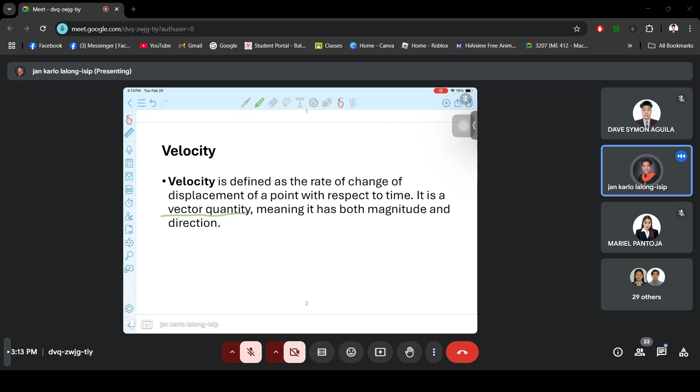Okay, so velocity analysis, understanding velocity in machine elements is crucial for the design analysis and optimization of mechanism. So velocity analysis helps engineers to predict the motion of different parts of a machine, ensuring it functions smoothly and efficiently. So this knowledge is essential for determining the speed and direction of the motion of the machine components.

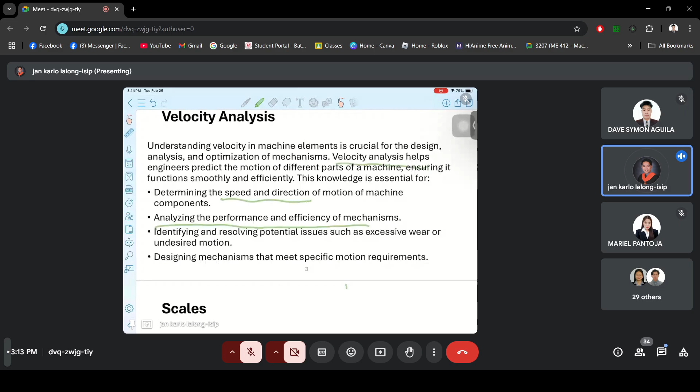It is also used to analyze the performance and efficiency of mechanism, identifying and resolving potential issues such as excessive wear or undesirable motion. Also, designing mechanisms that meet the specific motion requirement. So those are some of the pinagagamitan ng ating velocity analysis. Bakit siya importante na isolve?

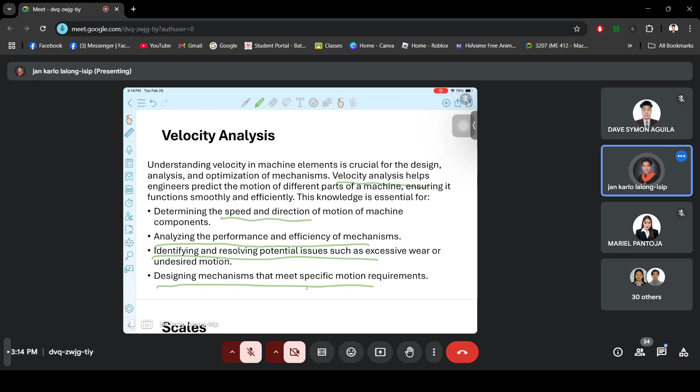Okay, so in velocity analysis, we are using different scales. So since, okay, so kasi when we are solving velocity or we are conducting a velocity analysis, we are both using our analytical and graphical method. Kaya naman, in velocity analysis, napaka-importante na meron tayong scales.

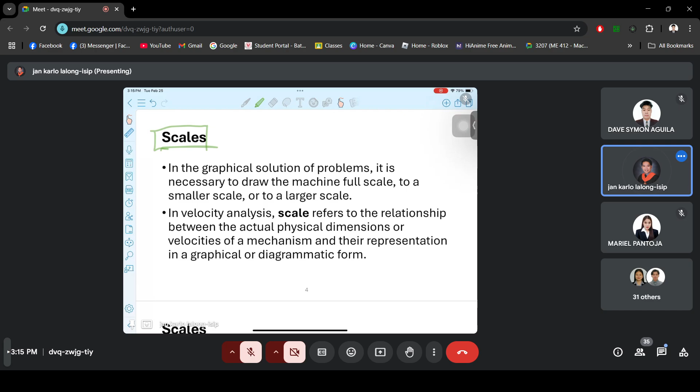So, in graphical solution of problems, it is necessary to draw the machine full scale to a smaller scale or to a larger scale. So in velocity analysis, scale refers to the relationship between the actual physical dimension or velocities of a mechanism to the representation in a graphical or diagrammatic form. Okay, so we have a different symbol for scales.

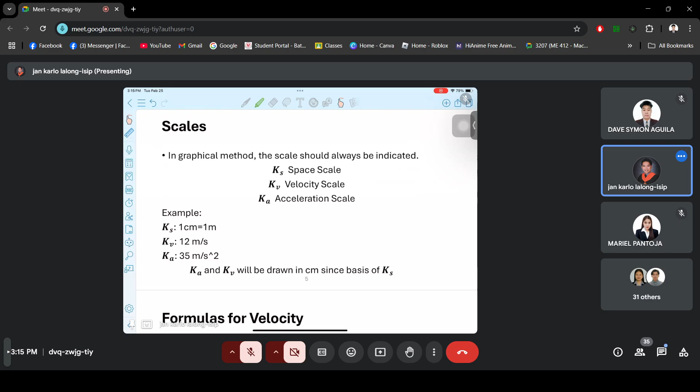So kapag ka ang nakita natin sa problem is K sub S, meaning that is a space scale. So position lang yung ating mini-measure dyan. Yung length lang ng ating mga links, length ng ating components ng ating mechanism. Kapag ka naman K sub V, that is velocity scale, ibig sabihin the scale represents our velocity. And pag K sub A, that is acceleration scale.

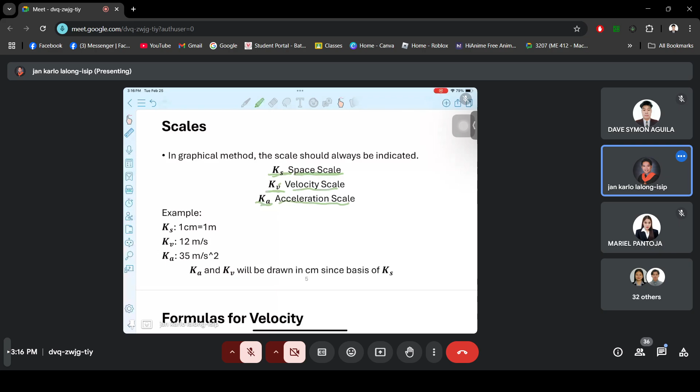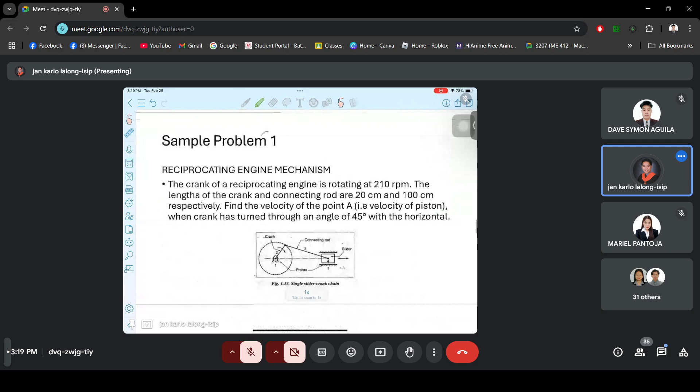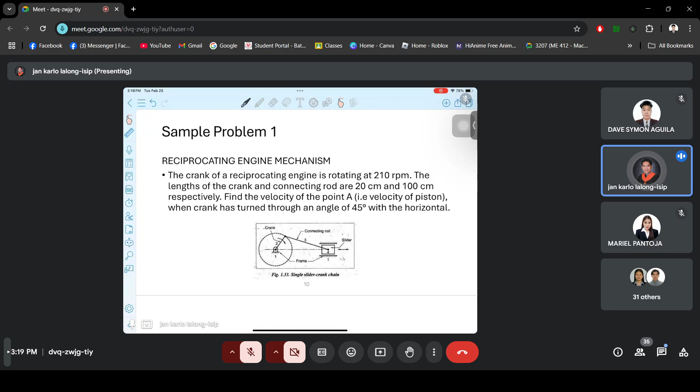Okay, so mas madali nating maintindihan yung ating paggagawa ng velocity analysis kapag meron na tayong problem. So that's why we have here a sample problem. And let's try to solve this one. Okay, so sabi dito, this is a reciprocating engine mechanism. So the crank of the reciprocating engine is rotating at 210 RPM. So we have N is equals to 210 RPM.

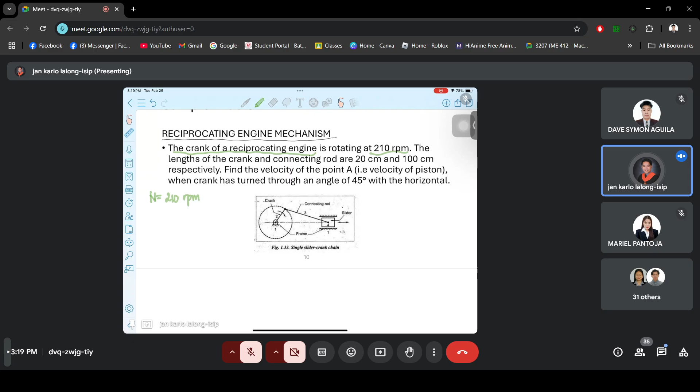The length of the crank and the connecting rod is 20 centimeter and 100 centimeter respectively. So we are going to find the velocity at point A when the crank has turned through the angle of 45 degrees with the horizontal. So for this pala, this is a slider crank mechanism. Pero mali lang yung nilagay kong figure. So let me correct yung ating drawing dito.

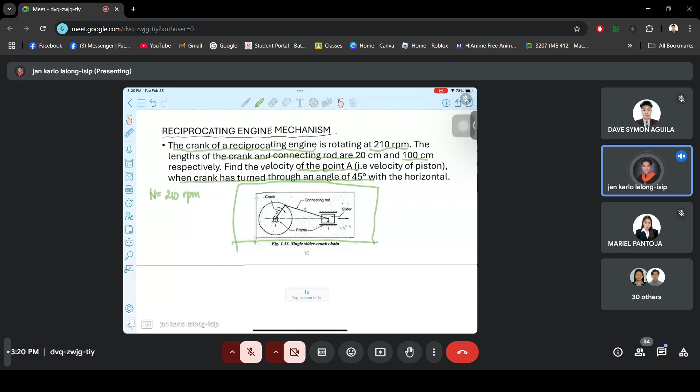Okay, so kindly take note lang of the problem solving steps para hindi tayo mahirapan kapag binigyan na tayo ng problems, para alam nyo kung paano siya isosolve. Okay, so first step, we are going to have the illustration for us to visualize ano ba yung ating kailangang kunin na mga values. Okay, so if we have a slider crank mechanism, we have these links. So we have the crank, so ito yung ating pinaka-crank, di ba? We have our connecting rod.

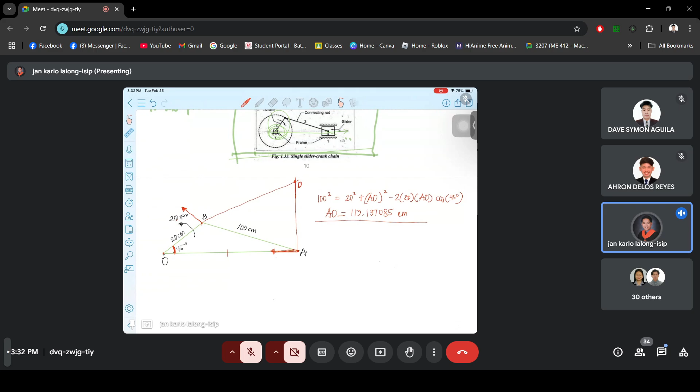Tapos we have, so we are going to extend yung ating line OB. So ito yung ating intersection. So let's name this point D. With that, mas madali na nating mahahanap yung ating mga missing values. So this is only initial graph ng ating slider crank. So we need to have the exact value ng ating graph para makuha natin ang length ng ating line BD at saka line AD.

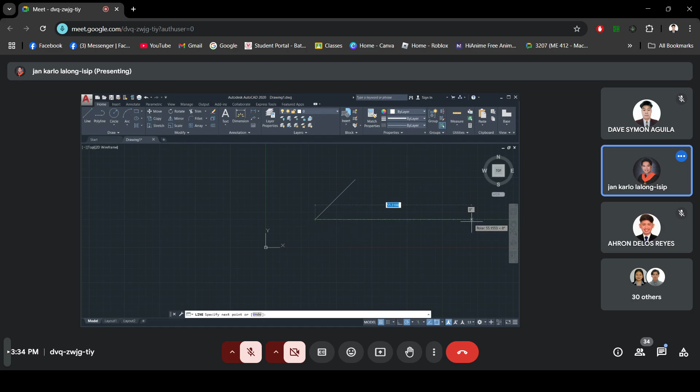Okay, so itry natin ngayon sa ating AutoCAD. So kapag kayo na yung gagawa, we have our ruler and protractor para mas madali natin magawa. So para lang din mapakita ko sa inyo kung paano siya gawin, we are going to use AutoCAD. Okay, so yung ating given kanina, we have the crank na meron daw 45 degrees, tapos siya ay 20 centimeter. So when you are using your paper, you must use scale para mas madali siyang ma-drawing. Tapos, we have find yung ating line connecting ng ating crank at saka ng slider. So, na-solve natin yung line AO to be 113.137085.

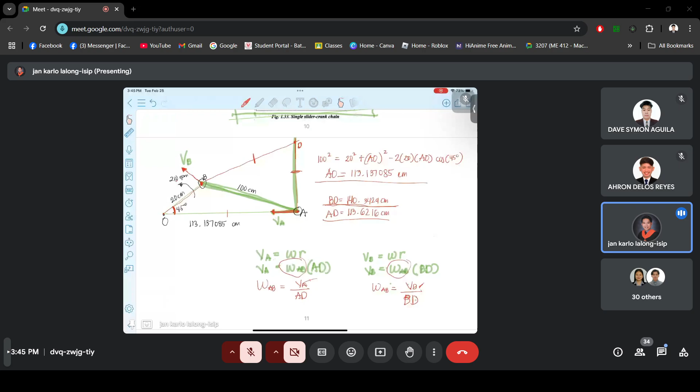Okay, so wait lang, nagkakaproblema lang, mabagal ata ang internet.

Okay? So, since meron tayong given na speed sa ating crank, pwede nating mahanap yung ating velocity at point B. So, paano? So kanina, we have the formula for velocity, which is the angular velocity times our radius. So if we are going to get yung ating velocity at B, pwede natin gamitin yung ating angular velocity at the crank. So that is angular velocity at OB times our radius. Ang ating radius ay OB.

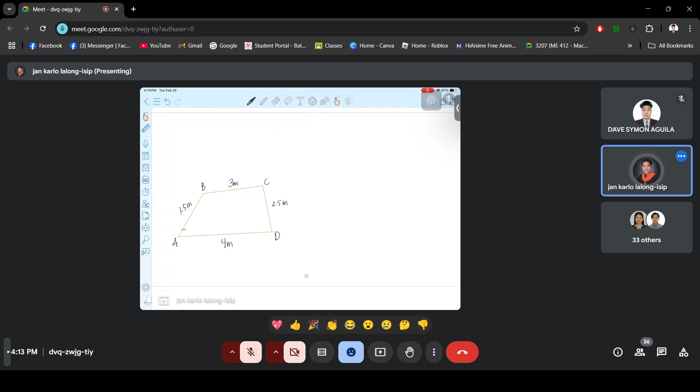Tapos, the driving link AB. So, that is the crank. AB is 1.5 meter. Tapos, the driven link CD ay 2.5 meters. Tapos, yung ating connecting link BC is 3 meters. Tapos, we are given angle BAD, which is 60 degrees.

Okay. So now, para mas madali nating mai-graph yung ating given four-bar linkage, we are going to get yung ating transmission angle at saka yung ating output angle. So, ilang beses na tayo nakapag-solve ng ganito. So, kindly solve what will be our value of the transmission angle and the output angle.

So, I will give you 5 minutes to answer. Tapos, maglagay na lang ako ng pagpapasahan nyo sa Google Classroom para alam ko that everybody is trying. Okay, so please solve for the transmission angle and the output angle. So I will give you, sige, mga 10 minutes na pala to solve.

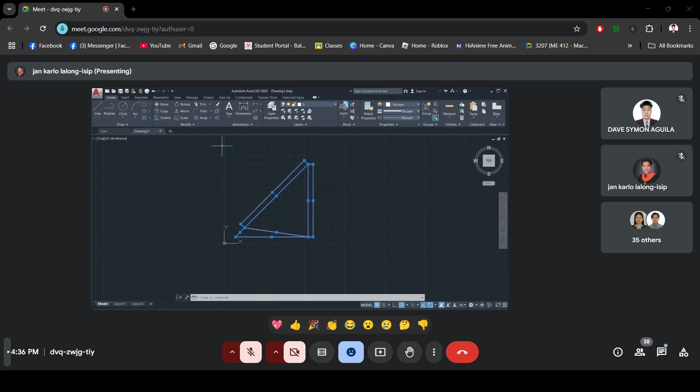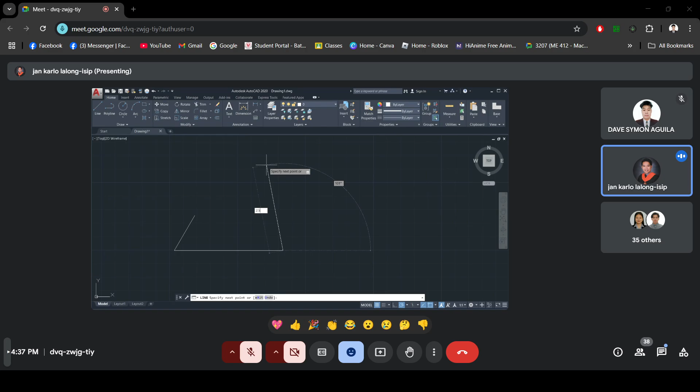So ngayon, we are going to have the graphical method naman para makuha natin yung exact illustration ng ating 4-bar linkage. Okay, so let me share again yung ating AutoCAD. Okay, so dinodrawing ko lang dito yung ating nakuha na values kanina. So again, we have the crank na 60 degrees na angle. Tapos yung ating output angle naman, that is 101. Tapos ang kanyang length ay 2.5. Tapos ito, we have 3 meters.

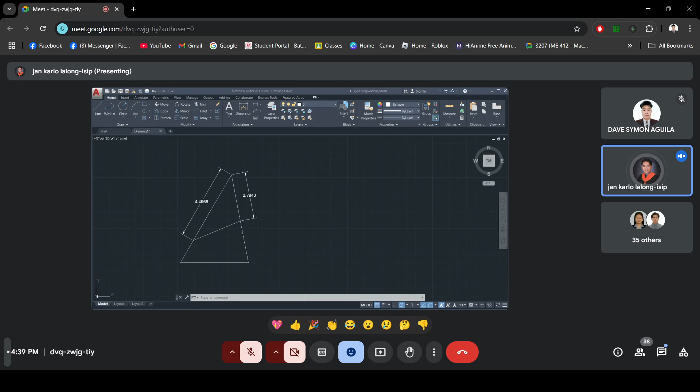So ang next step natin, kukunin natin ulit yung ating instantaneous center. So with that, i-extend natin yung ating dalawang link dito. So ito, extend lang natin. Tapos ito, extend din natin yung ating link number 4. Okay, then we are going to get yung kanyang dimension. So I will just take note muna yung ating measurement na nakuha. So we have CO is equals to... Okay. So let's go back dun sa ating presentation.

Okay. So ang ginawa natin kanina, we have the extension. So burahin muna natin to. Okay. So, in-extend natin itong ating link AB at yung ating link CD. And we have this point. Tapos, using our graphical method kanina, we have discovered na ang length, so let's just say this is O. So, our CO, yung length na ating CO ngayon, that is 2.7843 meters. Tapos yung ating BO ay 4.4968 meters.

Okay. So ngayon, we are going to proceed na with our velocity analysis. So, focus muna tayo dito sa ating figure na ito. Okay, so according sa ating problem, may isa pa diyang nakalagay na our link AB rotates at 25 RPM. So this link AB has the speed of 25 RPM. Okay. So with that, we can get yung ating velocity at point B. So this is our velocity at point B. So ang hinahanap natin dito is our angular velocity at CD. So CD, itong side na ito. Itong link na ito. At saka sa BC, so itong link na ito.

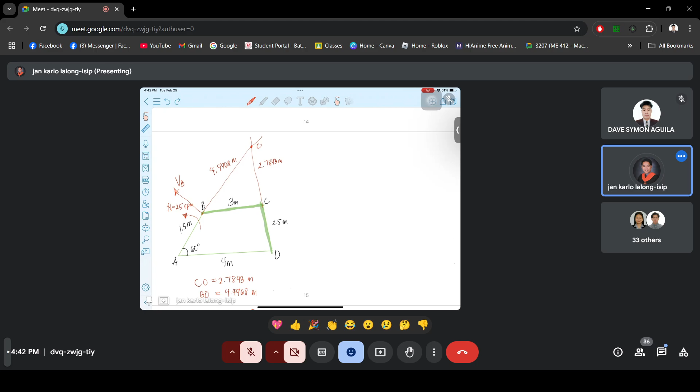Okay, so paano ba natin yan hahanapin? So, buburahin ko na tong part na to. So, have you taken the screenshot naman? Okay, so makukuha natin ngayon yung value ng ating VB since makukuha natin yung angular velocity at AB. So we have velocity at B. So using yung ating formula, we have the angular velocity at AB times our radius. So ang ating radius dito is our crank or AB. So let's just simplify yung ating formula na angular velocity at AB times our length of AB.

Okay, so first we are going to solve yung ating angular velocity AB. So we have angular velocity AB is equals to 2 pi n, which is equals to 2 pi times our n, 25 revolutions per minute. Tapos, gawin na lang natin siyang in seconds, kaya 1 minute is equals to 60 seconds. Cancel yung ating minutes. So, what will be the value of our angular velocity AB? Paki-compute. So we have 2.617993878 rad per second.

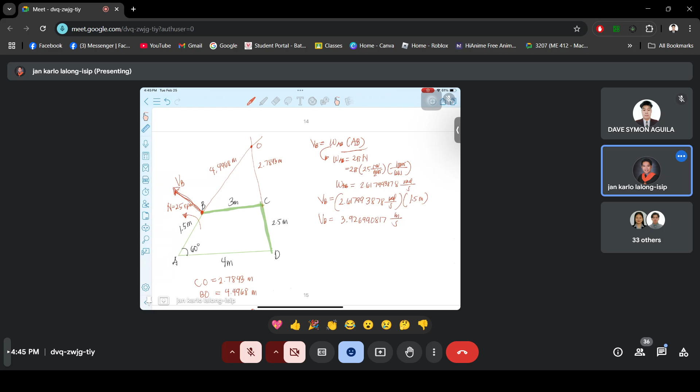So, kung makikita naman natin, this is still perpendicular dito sa ating line OB. Diba? So, meaning, pwede natin makuha yung ating angular velocity at BC, dito sa side na ito. Okay. So, velocity at B is equal also sa ating angular velocity at BC since this point is at this link. So, the angular velocity of BC times yung line na perpendicular sa direction ng ating velocity, which is the length of BO.

Okay. So, we have VB na value, kaya makukuha na natin yung ating angular velocity at BC, which is equals to VB over BO. So, ang VB natin is 3.926990817 meters per second over yung ating BO na value ay 4.4968 meters. So, what will be the value of our angular velocity BC? We have 0.8732856291 rad per second.

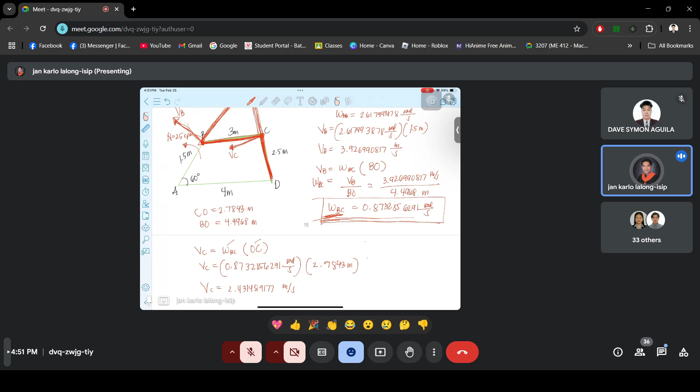So ito ba yun? We have 2.43148. Okay, so pare-pareho naman yung sinesend yung sagot. So 2.431489177 meter per second. Okay, so since meron na tayo nito, velocity at C, pwede na natin kunin ngayon itong ating angular velocity CD, which is our missing value.

Okay, so velocity at C, using the formula, since this line is also perpendicular dito sa ating CD, so we have the angular velocity at CD times our length ng CD. So using this equation, we can have the angular velocity CD is equals to VC over CD. Ang value natin ng VC is 2.431489177 meter per second. Tapos, ang length ng ating CD ay 2.5 meters.

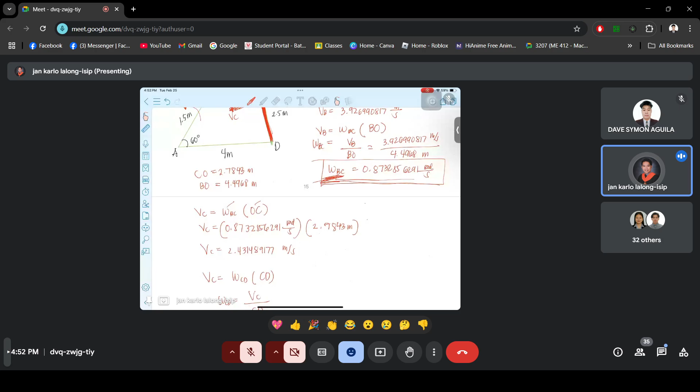Okay, so what will be the value of our angular velocity at CD? So we have 0.9725956709 rad per second. Okay, so with that, nakuha na natin yung missing value natin, which is the angular velocity at BC and the angular velocity at CD. Okay, so nakuha ba yung ating velocity analysis using the instantaneous center of rotation method?

Okay, so I think medyo mahirap nga siyang i-absorb, but if you get kung paano yung sunod-sunod at yung concept kung paano siya kukunin, you just need to review it para ma-master nyo kung paano siya gawin. So hindi nyo naman din talaga matatandaan yan just after this class. So you need to practice. So I hope you take a screenshot ng mga na-solve natin para after this class you can practice that, and also for the preparation for your examinations and design plate.

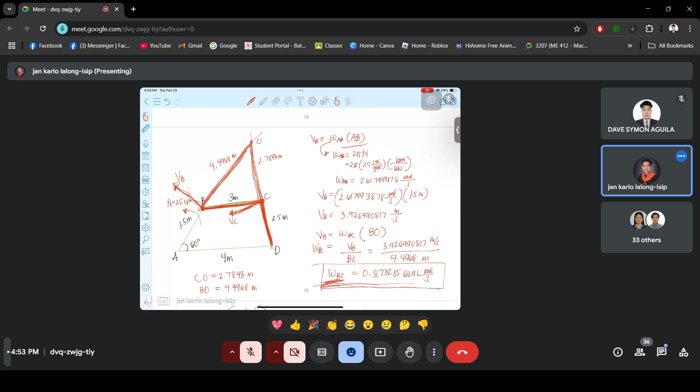Okay, so do you have any question with our lesson? Naintindihan naman? So I'm not expecting naman na fully ay nagets nyo.

Okay, so ang next class na natin is next week. Bale, we have Monday, and that is face-to-face. So again, that is scheduled para sa ating design plate number 2 naman. So our design plate number 2 will be velocity analysis using our instantaneous center of rotation method. Okay, so A3 ulit yung gagamitin natin.